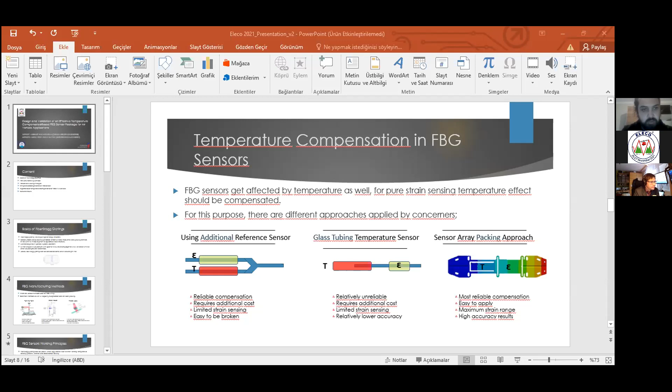Sorry, there's something written in the chat. Please, colleagues, move the presentation into full screen, then proceed page by page, because we are seeing only the first slide. Okay, just give me a second, please. You can still see my screen, right? Yeah, just switch to full screen, please. F5, I think. Now is it clear? No, we are seeing it in editing mode. Let me stop the share and reshare it. You have to share the full screen of your computer, not only the window. Now better? Now fine, right? Super. Thank you. Sorry for taking your time.

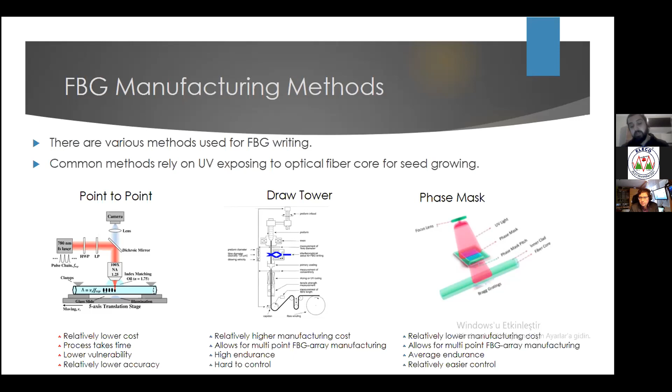So in this technique, we direct the UV light onto the phase mask, creating a pattern, and transfer this pattern into the core of the optical fiber, and eventually we get a grating structure. This allows us much more control compared to the other ones, while reducing manufacturing and maintenance cost. Also, just like the draw tower one, with this technique we can achieve multi-point FBG array manufacturing, which is one of the most valuable advantages of fiber Bragg grating sensors compared to conventional strain sensors.

So let me continue with the working principle. Okay. Fiber Bragg gratings can be used in a variety of applications, such as strain, temperature, pressure, vibration, and acceleration sensing. Here we have to mention that, apart from strain sensing, all other sensing types, temperature, vibration, pressure, and so on, basically depend on the strain sensing protocol.

What I mean is that all sensors made of fiber Bragg gratings basically rely on strain sensing, but with some model development or some numerical approach, we convert the strain value obtained by the FBG sensor into temperature, vibration, acceleration, and so on. So here, in most cases, we will be talking about uniform gratings.

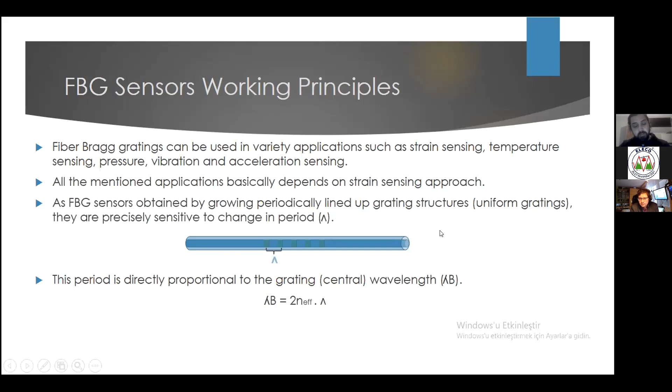The uniform gratings are those having the constant period in between, as I mentioned in the very early stage of the presentation. And when we look at the equation written in the bottom of the page, I see that lambda B, which is the Bragg wavelength or reflected wavelength, is equal to 2 times n effective times period. n effective is the effective refractive index of the optical fiber, and it's constant, only changing with the type of optical fiber, and there is no impact during the FBG writing stage on the effective refractive index. That we cannot change.

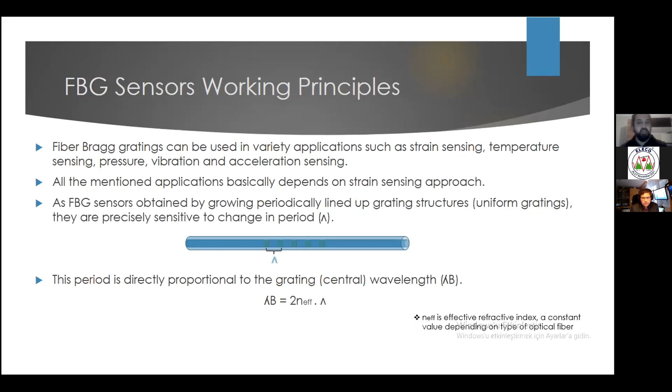Okay, the amount of shift basically depends on a few parameters. So in order to understand how fiber Bragg grating sensors are properly working in terms of strain and temperature sensing, we have to divide them into two classifications, strain and temperature. So in this context, if I'm looking for the strain relation in the Bragg wavelength, I should consider the first equation. In this equation, I basically see that the total change in the length of optical fiber is changing the Bragg wavelength. Here in the first equation, I see pe as a constant value, and that's equal to 0.78

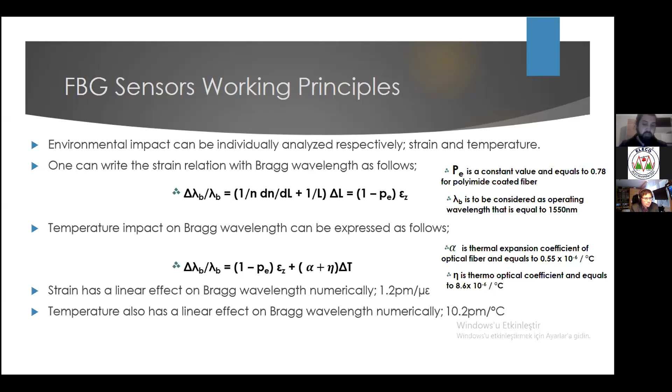I get the result of 10.2 picometers per degree Celsius, which means when I mount my optical fiber Bragg grating onto some sort of specimen, let's say it's an alloy, and I keep the temperature value constant, I will keep getting the same result. But in case the total temperature in the environment changes, let's say 5 degrees Celsius, then without considering any strain, I will see a reflected wavelength shift of 10.2 picometers times 5, and that's equal to basically 51 picometers.

Okay, so as I have given an example, even if there is no change in the strain value, if environmental conditions change in terms of temperature, I will observe some physical effect on the optical fiber. In this case, I might be confused whether the cause of this shift is coming from the strain or from temperature. So in order to understand and evaluate the difference between them and only observe and track the strain change, I have to compensate for the temperature effect on the fiber grating structure.

And besides that, with this approach, I will add some additional cost to my optical fiber sensing system. Moreover, I will have limited strain sensing. Why? Because the temperature sensitivity is 10.2 picometers per degree Celsius. And in some environments, the temperature range within a day goes up to 30, 40, maybe 50 degrees Celsius. So it will limit my strain sensing as well.

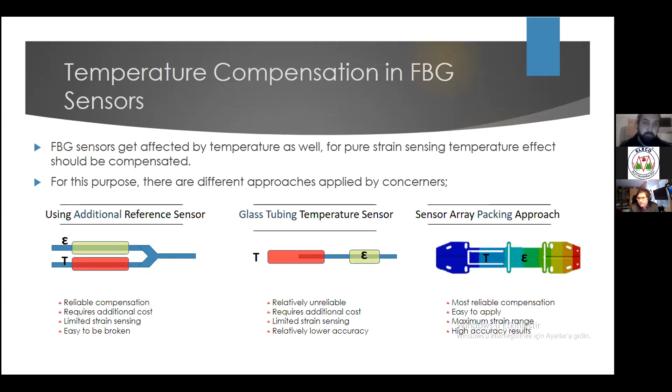But still, we have to agree that the temperature value might change within a long specimen. So we have to put some measuring spots into the wing or anywhere in the body to understand the distribution of the temperature within the body itself, and only that way can we measure the strain results properly.

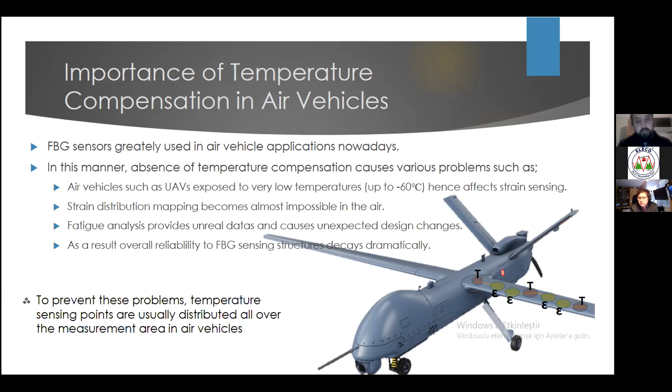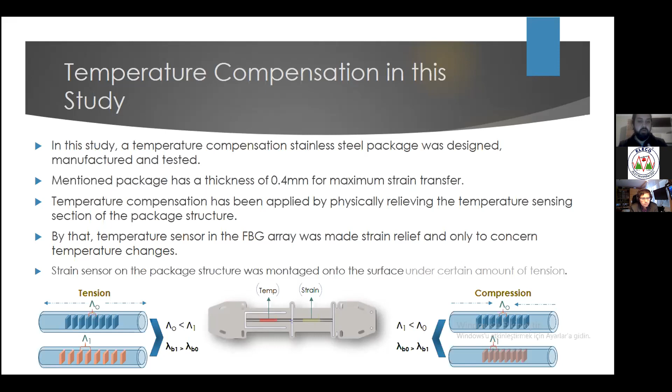And here I can finally say that the tension applied to the optical fiber is greatly transferred to the package, and so distributed through strain and temperature sensors. As you may remember, in the first slides I mentioned that the strain sensing for the bare fiber should be 1.2 picometer per microstrain. We finally achieved that value, as you might see in the picture, although we are using a package.

So let me just go a bit faster and talk about the results. We have three types of tests that are a must for a properly working optical fiber. The first one is the no load creep test. We are considering the creep test in order to understand the effect of the epoxies and some other additional materials we are using for mounting the optical fiber to the package.

So here we see that we have gone through 3,000 minutes, which is 50 hours, and we just released the optical fiber package without any tension in a stable environmental condition, and we have seen that after 500 minutes it stays steady. Which means if you manufacture such an optical fiber, you have to keep the optical fiber at least for 500 minutes to get to this steady level.

So in order to understand how it reacts under load, we have done an under load creep test. In this test, according to the results we received from ANSYS, our package structure shown on the left picture is durable up to 150 newtons from the spot load. So we decided to use a load equal to 140 newtons, 14.65 kilograms in terms of weight.

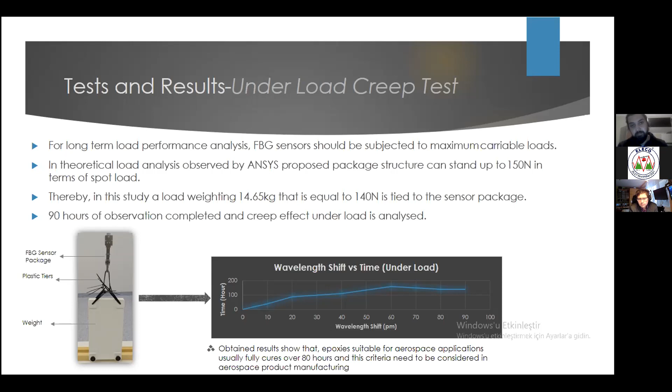And we have seen that when I hang the load and tie it to the grating package, after like 70 or 80 hours it stays steady and it doesn't change. It means if you have a very sensitive measuring case, you have to first mount your optical fiber to the specimen and wait for 80 hours for the most precise result.

And finally, we have gone through a tension test, and this tension test was handled in Bursa Technical University using a Shimadzu AGX 250 kN tensioning system. We loaded the optical fiber package starting from 0 to 15,000 newtons, and we have seen that the three specimens had the highest durability as compared to the conventional ones that we are buying from the sensor industries.

Even in air vehicles, I must talk about the UAVs. The maximum strain we see in the UAVs in extreme conditions does not exceed 4,000 microstrain. But in our experiment, the sensor which has the lowest durability even goes more than 5,600 microstrain, which means the manufactured sensors are surely suitable for the UAVs and other air vehicles going through 30,000 feet.

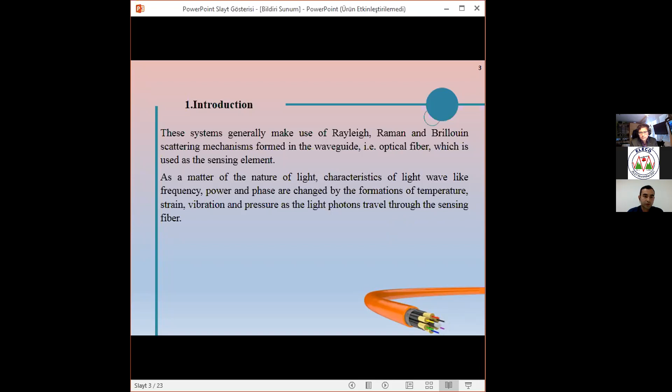Distributed acoustic sensing, also known as distributed vibration sensing, is an optical fiber sensing method depending on phenomena using Rayleigh scattering. In this kind of distributed sensing method, optical time domain reflectometry, OTDR, is utilized for getting time and location information where scattering of the light wave has occurred along the sensing fiber. In the OTDR-based method, acoustic changes and vibration formations occurring along the fiber cause a shift in the phase of the backscattered optical signal. The phase shift and phase change information along the sensing fiber are obtained by subtracting a phase OTDR trace from an earlier stored trace.

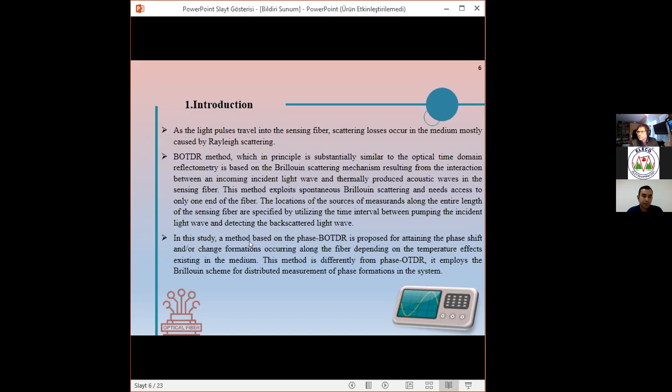In the study, a method based on phase BOTDR is proposed for attaining the phase shift and change formation occurring along the fiber depending on the temperature effects existing in the medium. This method is different from phase OTDR. It employs the Brillouin scheme for distributed measurement of phase formations in the system. In the phase BOTDR method, Brillouin power change and frequency shift of the backscattered signal are exploited to obtain temperature information occurring along the sensing fiber.

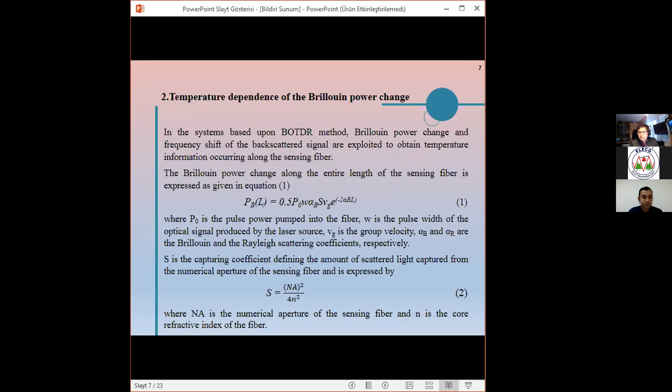The Brillouin power change along the entire length of the sensing fiber is expressed as given in equation 1. S is the capture coefficient defining the amount of scattered light captured from the numerical aperture of the sensing fiber and is expressed by equation 2. The Rayleigh and Brillouin scattering coefficients used in the Brillouin power change are stated as given in equations 3a and 3b, respectively. The parameters and values utilized in the equations are given on the slides.

In BOTDR-based temperature sensing, temperature profile along the fiber can be obtained from the temperature dependence of the Brillouin power change. Temperature dependence of Brillouin power change for zero strain is given with equation 4.

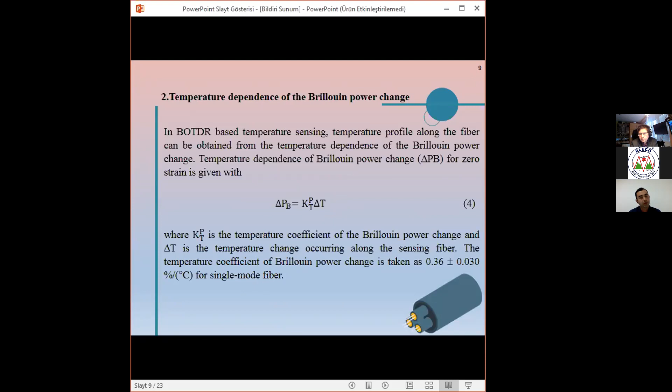In distributed acoustic sensing systems, when an external vibration effect is generated on the section of sensing fiber or a quantity change occurs, fiber length and the core refractive index of the fiber will vary linearly. Any change made in refractive index causes both the phase shift and the phase change on the optical signal pumped into the fiber. At the moment when the change happens, distance information is obtained using the correlation between time delay and the speed of light.

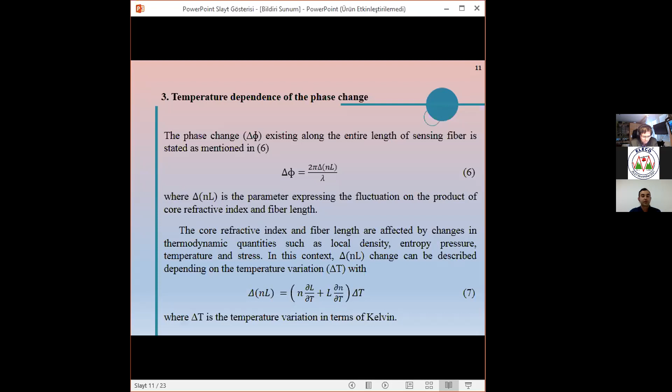The optical phase shift can be written as a function of core refractive index and length of the sensing fiber as given by equation 5. The phase change existing along the entire length of sensing fiber is stated as in equation 6. The core refractive index and fiber length are affected by changes in thermodynamic quantities such as local density, entropy, pressure, temperature, and stress. In this context, delta NL change can be described depending on the temperature variation with equation 7.

Using spatial resolution delta Z instead of the unit change in fiber length and reorganizing, equation 7 takes the form in equation 8. The phase change can be given as in equation 9. Temperature dependence of the core refractive index of the sensing fiber can be described by equation 10.

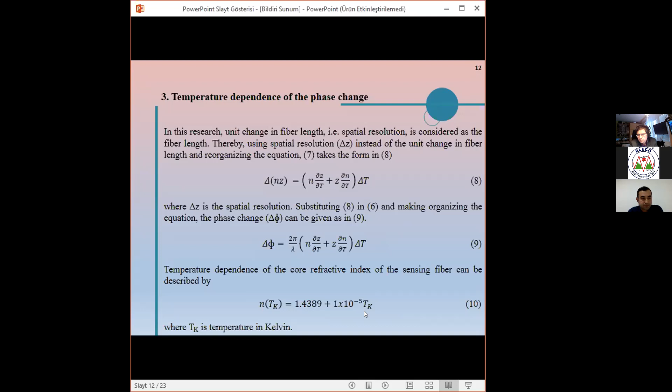When heating the fused silica fiber, longitudinal change delta L takes place along the sensing fiber depending on the parameters of thermal expansion coefficient, initial length of the fiber, and temperature variation. Taking the initial or original length of the sensing fiber as equal to the spatial resolution, longitudinal change can be stated as equation 11.

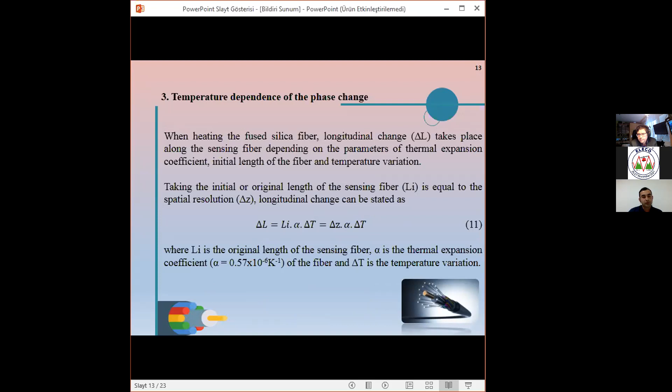Acousto-optic modulator AOM is added next to the EDFA1 to suppress ASE, amplified spontaneous emission, noise generated at the end of the amplifier. The circulator is utilized for both routing the optical signal towards the ovens and Brillouin components of the backscattered signal to EDFA2. The band pass filter passes frequencies within a certain range. The data analyzer unit is exploited for processing electrical signals and getting information related to the temperature dependence of phase change in the system.

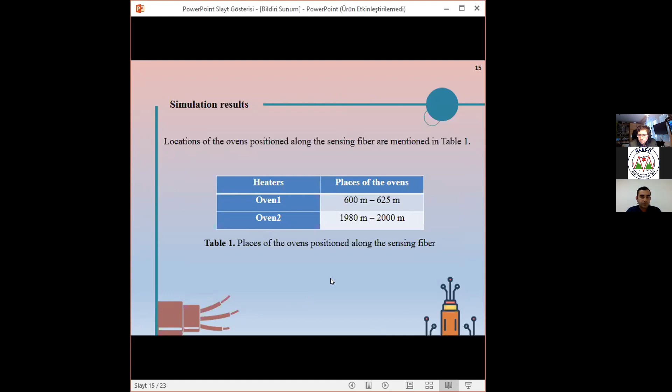Locations of the ovens positioned along the sensing fiber are mentioned in table 1. We use the ovens in distributed acoustic sensing configuration in order to model the temperature formations along the sensing fiber. Simulations have been accomplished using MATLAB 2020B on the model based on the phase BOTDR for analyzing the temperature dependence of phase change in this research.

In the model, thermal effects on the sensing fiber have been modeled by placing two ovens having different heating capacities along the fiber cable. Temperature profile for the sensing fiber with the length of 2,500 meters is shown in figure 3. As seen in the figure, there are two hotspots where the ovens are positioned along the sensing fiber. In these fiber regions, the highest temperature values have been observed as 298 Kelvin and 297.5 Kelvin at the 619th meter and 1993 meters respectively.

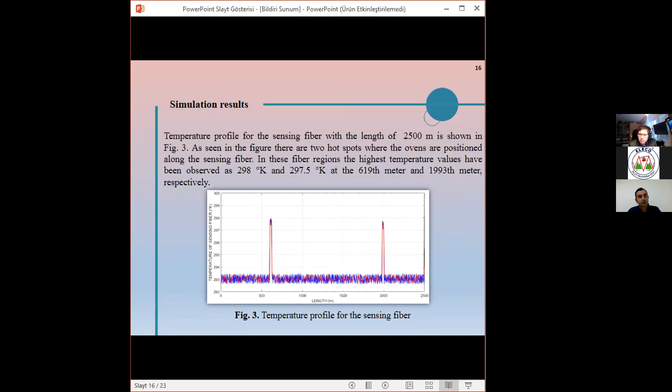Phase change due to the temperature variation along the sensing fiber is illustrated in figure 4. In regions where sensing fiber passes through the ovens, i.e. in ranges of 600 meter to 625 meter and 1980 meter to 2000 meter, phase change reaches the maximum values with 227.7 radian and 214.2 radian respectively.

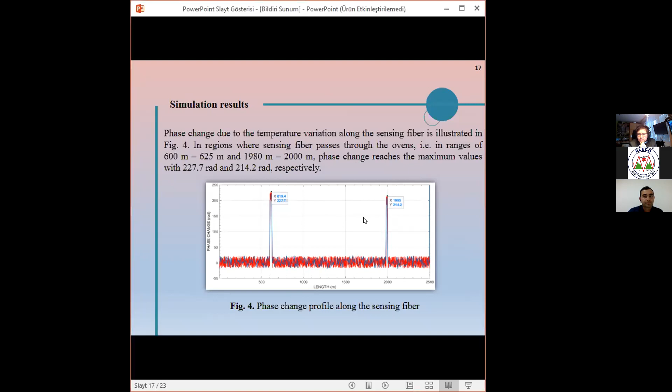It is clearly seen from figure 4, as the temperature increases, delta NZ shows a tendency to rise linearly. In other words, the higher the temperature is, the greater the delta NZ is. For room temperature of 293 Kelvin, delta NZ gets the value of 0. Simulation related to the relation between temperature variation and delta NZ change in the temperature range of 290 Kelvin to 350 Kelvin is shown in figure 5.

For getting the simulation indicated in figure 5, interpolation method is employed to have temperature information along the sensing fiber, and thus a linear formula representing the temperature dependence of delta NZ change is obtained as in equation 12 for the given temperature range.

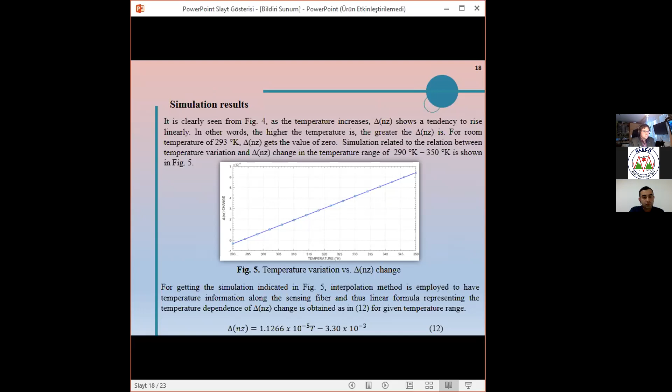Simulation concerning the temperature dependence of phase change is shown in figure 6. As obviously seen from the figure, temperature formations occurring along the sensing fiber cause the phase change to increase linearly. Using equations 9, 10, 11, and the methods of curve fitting and interpolation, the linear equation related to the temperature dependence of phase change is derived as in equation 13 for temperature values changing in the range of 293 to 298 Kelvin. Phase change occurring along the sensing fiber varies between 0 radian and 227.7 radian.

When taking the first derivative of 13 with respect to temperature, the variation ratio between phase change and temperature can be attained. In other words, a 1 Kelvin variation in the temperature of the fiber core causes 45.667 radian variation on the phase change.

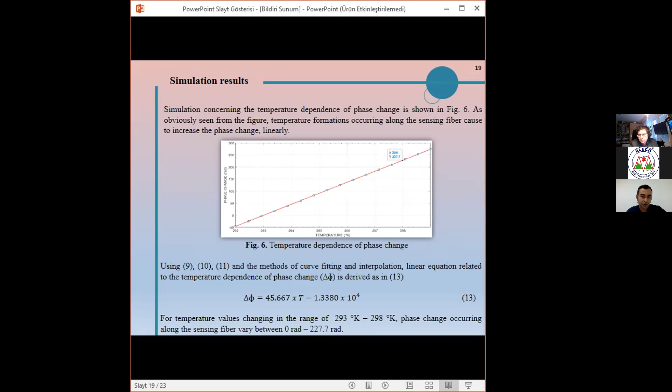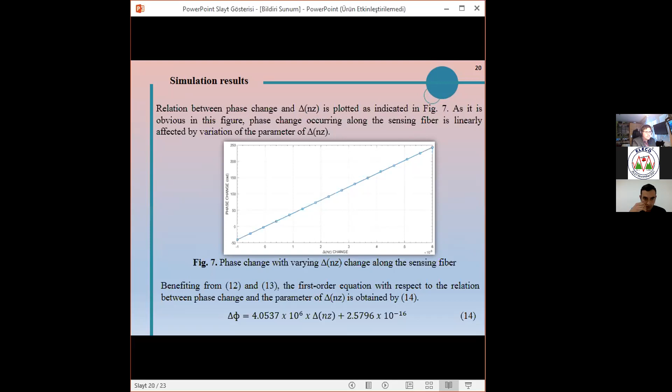In case of making a change of refractive index of the fiber core, a doping process is performed by adding a little amount of other chemicals during the production. Therefore, any fluctuation existing in the value of core refractive index of the sensing fiber will affect the phase change of the backscattered Brillouin signal guided within the sensing fiber.

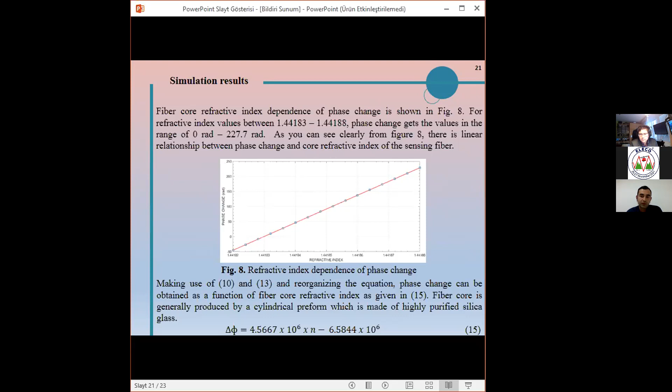In the study, a new phase BOTDR based method for distributed acoustic sensing of the phase change occurring along the sensing fiber has been proposed. In this context, a sensing model has been constructed for making analysis related to the temperature and core refractive index dependencies of phase change, and the relevant simulations have also been performed using MATLAB. The detection model was created and the related simulations were made using MATLAB 2020B.

Moreover, the linear equations related to the dependencies of temperature and core refractive index on phase change have been acquired for temperature variation in the range of 293 Kelvin and 298 Kelvin. Phase change shows an alteration between 0 radian and 227.7 radian, and core refractive index varies in the range of 1.44183 and 1.44188. Therefore, a 1 Kelvin variation in the temperature of the fiber core causes about 46 radian change on phase change, and a variation of 1.03 times 10 to the minus 5 in the core refractive index of the sensing fiber.

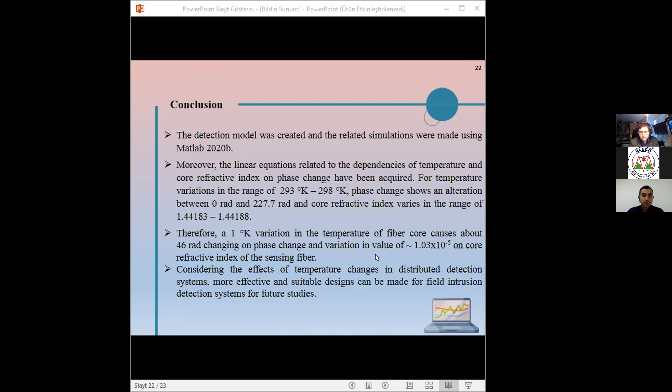So he is asking this question: what are the spatial and temperature resolution in your simulations? How did you determine them? Yeah. We used the equation of spatial resolution, delta Z, since it is depending on C times tau divided by 2N. Spatial resolution has been computed as approximately 1.041 meter.

Okay, you answered this question. So the same colleague is asking about temperature resolution, so you can react to this question. The number of measurement points for our DAS, distributed acoustic sensing, model we used in this study is about 2,400. We have computed this value by dividing sensing fiber length by spatial resolution.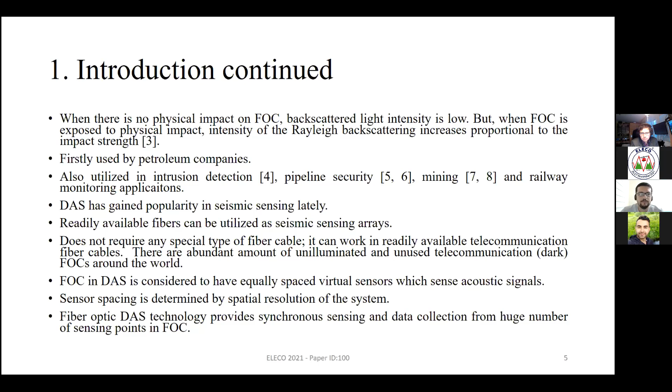So our experimental DAS system is based on phase-sensitive optical time domain reflectometry, which is the most popular and widely used technique in fiber optic DAS systems. This technique relies on Rayleigh backscattering in the fiber medium. To observe seismic events, we propose the fiber DAS scheme that is based on phase OTDR with coherent detection. The proposed DAS scheme can be seen on the slide.

The proposed DAS scheme is based on our fiber optic based acoustic sensing system, in short FOTAS, which was published 2 years ago. Our DAS scheme can be divided into 3 major components: the optical interrogator, the electrical signal analysis and storage system, and the fiber optic cable.

Optical interrogator. A basic configuration of an optical interrogator consists of a continuous wave laser source with very high frequency stability, an acousto-optic modulator, a 1x2 power divider, a 2x2 coupler, a circulator, and a balanced photodetector. The main task of this unit is to modulate continuous wave laser light with a given pulse shape and duration from the electrical signal analysis and storage system.

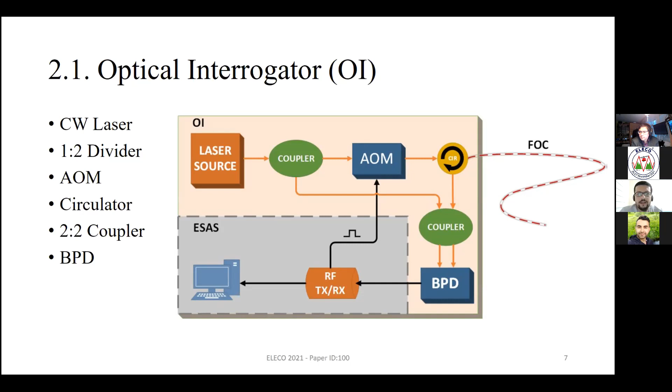And the electrical signal analysis and storage system. This is a fairly simple subsystem. It incorporates RF transmit and receive electronics and a computer with data storage devices. This unit is responsible for generating excitation pulses with the carrier frequency at which the acousto-optic modulator resonates. Also, this unit receives electrical signals from the balanced photodetector for further processing, and the balanced photodetector output contains a backscattered signal centered on 100 megahertz, which is the resonance frequency of the acousto-optic modulator.

So the received signal is first demodulated with an optical local oscillator, and then with an RF local oscillator, which is 100 megahertz. Then these signals are filtered with an RF bandpass filter, down converted to baseband, and filtered using appropriate RF mixers and filters. The resulting signal is digitized and transmitted to the computer for further digital signal processing and noise reduction. Actually, RF signal conditioning, down conversion, digitization, and some of the RF filtering jobs are held in the AD9364 RF agile transceiver from Analog Devices, which is repurposed and programmed specifically for DAS use by us.

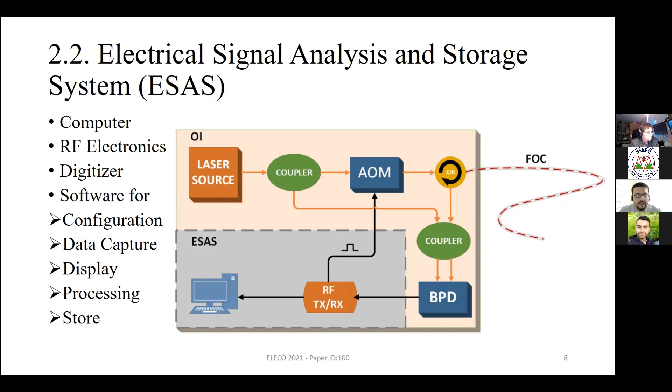And this is the most important part of the project. The fiber optic cable plays the crucial role in the DAS system. It is actually half of the system, and just a single cable can make you better at DAS sensing or worse. Its location and its coupling characteristics are very important in this field.

For fiber optic DAS sensing, we have used 2 different fiber cables. The first one is a 4 kilometer long buried telecommunication cable in the Gebze premises of TÜBİTAK, which we named the short fiber optic cable, approximately 50 kilometers southeast of Istanbul and nearly 10 kilometers north of the Marmara fault line. The second one is a 25 kilometers long buried telecommunication fiber, which we named the long fiber optic cable, lying between Gebze and Yalova.

It crosses the Gulf of Izmit. The second cable has a submarine portion around 5 kilometers long that lies under the Gulf of Izmit, approximately 40 kilometers southeast of Istanbul, and crosses over the Marmara Fault Line, which is expected to produce an earthquake with a magnitude of 7 or more in the near future.

The fiber cables used in this work go through many fiber junction boxes, which consist of splices and connectors. Each connection introduces attenuation to the light in the fiber medium, hence reduces the signal quality and maximum range. Also, they were laid underground many years ago, and the sole purpose of the fiber cables is actually communication. So the coupling between the fiber cable and the earth is unknown. Field tests can be conducted to identify the areas or points that have coupling problems in order to make better use of the fiber cable.

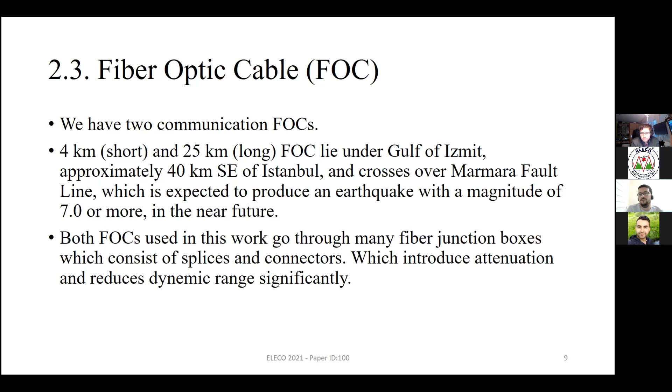Seismic data collection. We have been recording DAS data since August 2019. Earthquake events are monitored and filtered using data provided publicly by Kandilli Observatory and Earthquake Research Institute, Regional Earthquake and Tsunami Monitoring Center, thanks to Boğaziçi University. Selected earthquake events are extracted from DAS recordings and logged to be processed. The set of earthquakes detected between these two dates is presented in the results section.

We are able to detect most of the earthquakes which occurred inside the border of Turkey in the time interval between the given dates, which have magnitudes ranging from 1.1 to 6.9, and distances ranging from 12 kilometers to 1,319 kilometers. The nearest detected earthquake occurred in Istanbul, Turkey, which has a magnitude of 1.1 and a distance to the fiber optic cable of 12 kilometers.

The farthest detected earthquake occurred in the Turkey-Iran border region, which has a magnitude of 6.2 and a distance to the fiber optic cable of 1,319 kilometers. The DAS system we've been using is configured to have 17.5 or 25 meters of spatial resolution and a pulse repetition frequency of 500 or 1,000 hertz, depending on the recording section we have.

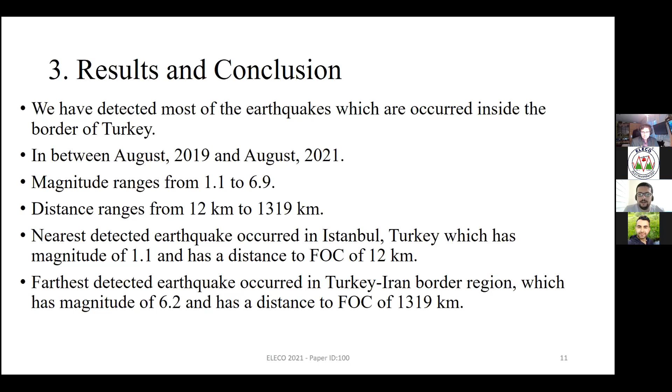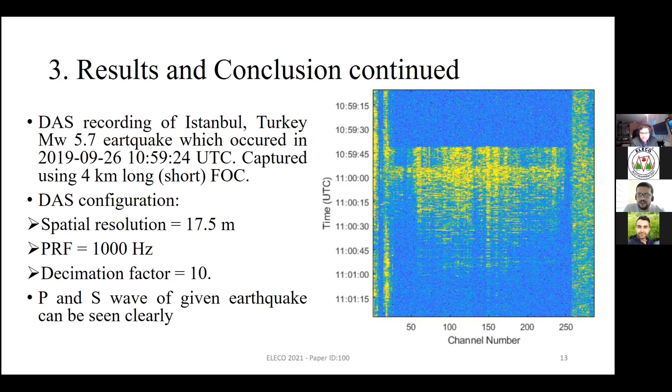We didn't do that in this graph, but DAS channels can be stacked to enhance DAS signal quality when single point measurement is insufficient, because there are many sensing points laid along the fiber optic cable, so to say.

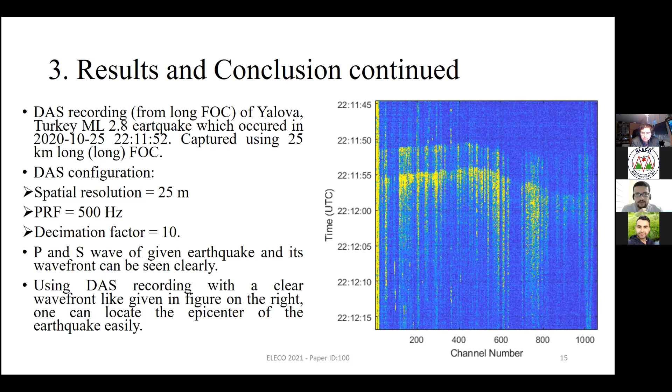This work shows that fiber optic DAS is a promising technology in seismology, as in other fields like intrusion detection, perimeter security, structural health, and so on. Our experimental DAS system is fairly simple compared to the state of the art, which may include optical amplifiers, different interrogation methods like Brillouin, fiber grating fibers, and so on.

But the performance of the proposed system can be improved by developing advanced DSP techniques and utilizing optical amplifiers, filters, and dedicated fiber optic cables solely laid for DAS use. DAS-purposed fiber optic cables are expected to have maximal earth-to-cable coupling, no or a minimal number of splices and connectors along their path, and be laid so as to avoid man-made noise.

Although such fiber optic cables are desirable for DAS applications, in reality it is nowhere near realistic due to the very high installation cost of fiber optic cables. We generally use dark fiber cables in order to minimize the installation cost, which makes fiber optic based DAS seismic research very popular.

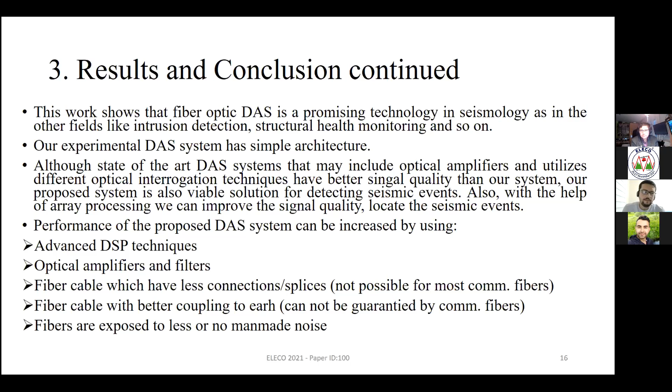Even with a simple DAS system like ours and regular communication fiber optic cables, we are able to detect earthquakes with distances reaching 1,319 kilometers, successfully using 4 and 25 kilometers long standard fiber optic cables, which are previously dark cables, with the help of simple DSP techniques. Although fiber DAS is not ready to replace conventional seismometers yet, we think that fiber DAS will augment them when more efficient and cost-effective data collection is required due to financial or geographic constraints.

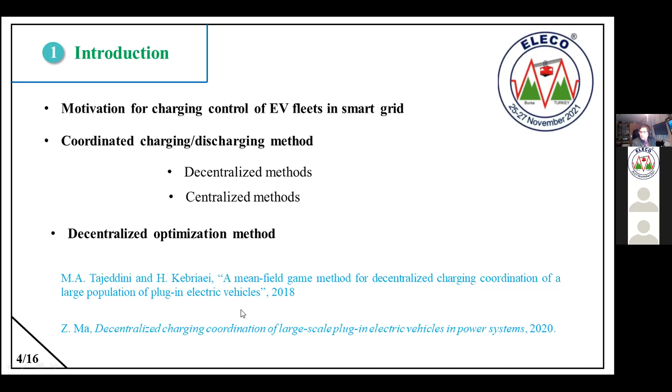In decentralization, in order to decrease online computation for a large population of PEVs, each PEV directly ascertains its charging preference based on its own authority. One decentralized optimization method, which avoids charging during on-peak time and fills the valley during off-peak time, is the valley filling approach, which is defined in these two papers. In our paper, we use the valley filling property. Okay.

In practice, PEVs may have different initial state of charge, different arrival time, different departure time, and the number of PEVs which enter the charging station at each time slot may differ and change. In this paper, we want to model charging control of each PEV by using different values for these uncertainties. In other words, we approximate the centralized solution around nominal values of these uncertainties. In our method, there is no need to solve any centralized or decentralized method, and in addition, this ensures privacy of each PEV and requires less online computation time than the centralized method.

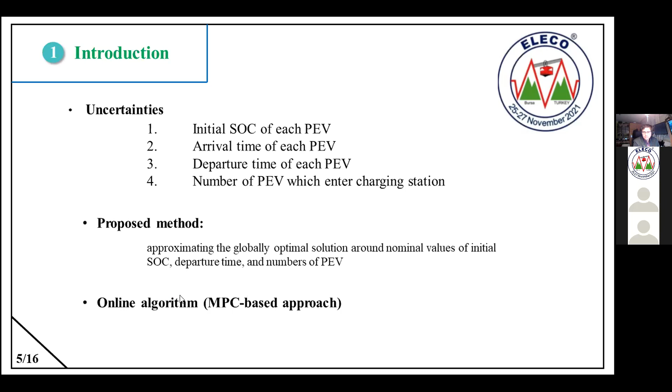And at the end, the system is dynamic, with EVs with different battery types coming and departing all the time. For this reason, it is not possible to have a stationary and long-term charging control. To tackle the dynamic system condition, we have proposed an algorithm which is based on an MPC approach, and we implement it online.

At first, we want to define our charging model. The charging model for each PEV is defined in this way. The state of charge of each PEV, for example the nth PEV, is defined by x_n(t). And there are some constraints for determining admissible charging control and state of charge. Our proposed model is based on a solution of the centralized optimization problem, this problem.

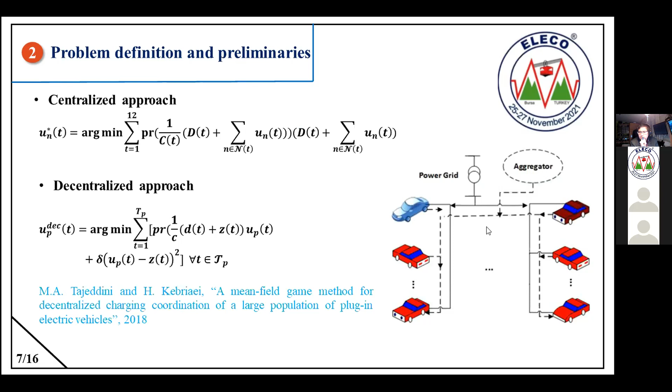There is one decentralized approach which is based on the mean field game method in this paper. In this method, each electric vehicle solves its own optimization problem and sends its solution to one aggregator. The aggregator broadcasts the mean field term to all PEVs, and we want to compare the online version of this algorithm with our method.

For our method, at first, we want to model these two uncertainties, initial SOC and departure time of each EV. Design parameters of the model are K1X, K2X, K1T, and K2T. At first, we assume all PEVs have nominal initial state of charge and nominal departure time in this way. For this case, U_n^nom, defined here, can be determined by solving one centralized optimization problem that is introduced later.

Okay. Now, for determining all these coefficients, we assume, for example, for n equal 1, by changing its own initial SOC around a nominal initial SOC, changes of the solution of a centralized manner around the nominal value are obtained. K1X, for this reason, is a linear approximator of these changes.

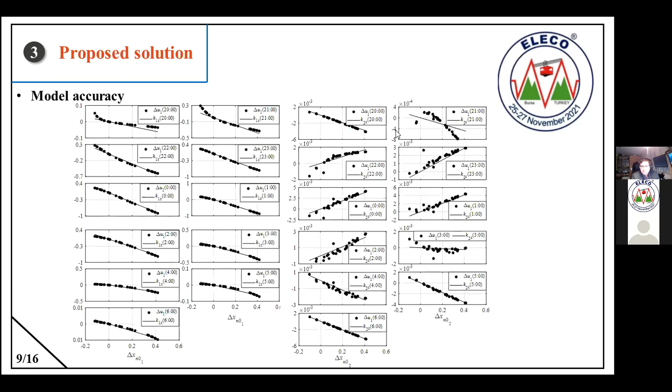From these figures, it is obvious that K1X and K2X, changes of the solution of the centralized method, are different from each other. In addition, by comparing the slope of these two figures, it could be concluded that the effect of the initial SOC of each PEV on its own differs from how it is affected by others. Similar results exist for departure time, in that the slopes of these two clusters are different.

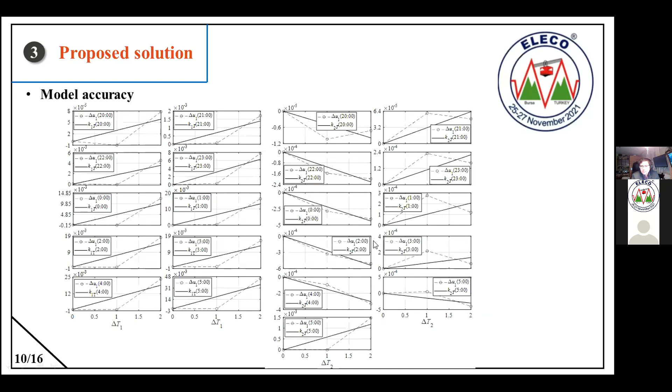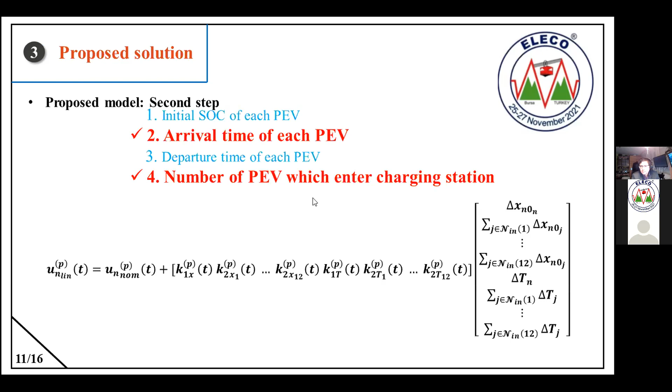Okay, in this part, I want to describe another source of uncertainties. At first, I want to describe arrival time, and second, the number of PEVs. We want to model different arrival times, as I said, and the number of PEVs at each time slot. At first, I want to only model arrival time.

For this reason, we classified plug-in electric vehicles based on their arrival time, and we consider one design parameter for all PEVs in the same class, the class that arrive at the same time. We consider one design parameter, as I said.

Of course, similar to what was mentioned before, the impact of initial SOC and departure time changes of each PEV on its own differs from how others are affected. Thus, we have considered distinct coefficients for K1xp and K1tp in this way. The method for calculation of K1x is that we change the initial SOC of, for example, the first PEV which enters at the pth time slot, and the changes of the centralized optimization solution for this first PEV result in K1x.

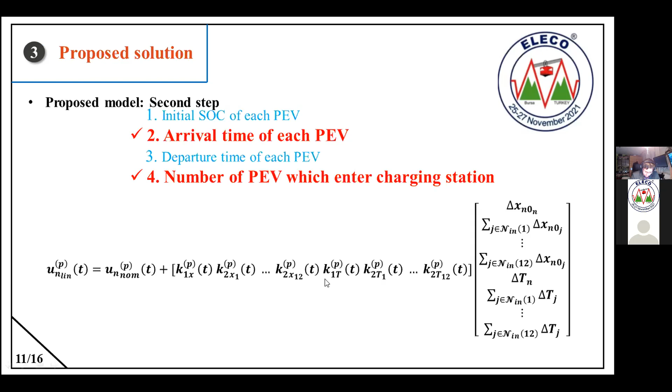For calculation of K2x, the initial SOC of one PEV, such as the first PEV that enters at the first time slot, is changed. By calculation of changes of the first PEV which enters at the pth time slot, K2x1p is determined. Other parameters in this equation are specified similarly. Okay.

It is noticeable in this figure that for designing this model, we consider the nominal number of PEVs which enter the charging station at each time. So the question here is how changes of PEV numbers affect the model. For answering this question, I should say that, for example, if the numbers of PEVs that enter at different time slots change, we would design 2 power 12 models for each cluster. This could cause complexity in designing the model.

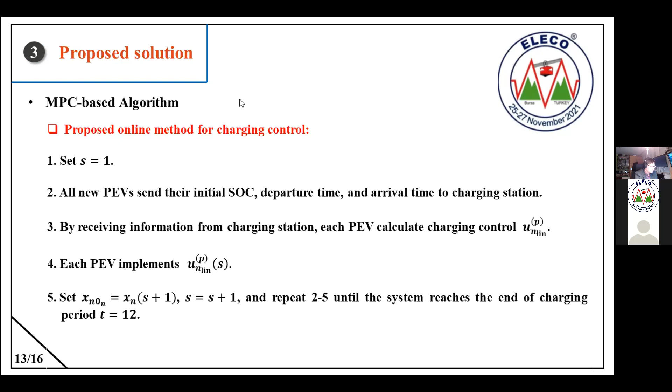For the online version of our algorithm, we used an MPC approach. The proposed online method for computing charging is summarized in this algorithm, which is based on the MPC approach, known as the receding horizon approach. In other words, after calculating the charging control of each PEV based on the model that I have mentioned, only the first element of the calculated charging control is implemented. In the next time slot, the charging station updates the system information, and we redo the calculation as mentioned here.

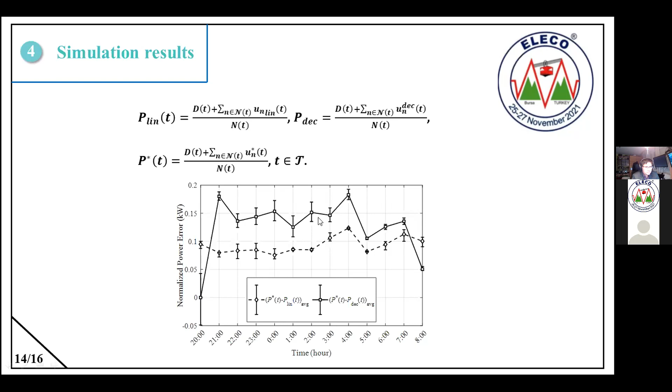To show how effective the proposed model is, the normalized power of our method has been compared to the decentralized method, as illustrated here. In this figure, it can be seen that the normalized power in the proposed model is closer to the centralized method than the decentralized one. For this reason, it worked better.

And for conclusion, I should say that we model effects of uncertainties on centralized optimization. We have investigated how design parameters of a model change with changes of PEV numbers, and we proposed an MPC-based approach to tackle the system condition dynamics. And we provide normalized power closer to the centralized solution than the decentralized one.